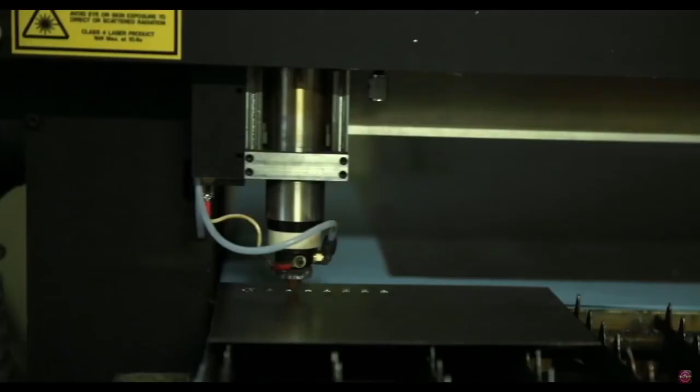The biggest set is maybe 20 feet long, so it was a real challenge for the crew to make a film like this at this sweeping scale. We used basically every trick we had. It was one of the most challenging, most ambitious things. You can see each day when they change their top, the animator in the background, their clothes change—that shows the move to the next day.

So there's a scene in this with a giant skeleton thing. You'd think they'll just make a miniature version of it and make it look bigger, but it's actually massive. Look at it.

A lot of people working with practical effects in films now are going out of their way to make something extreme. I'll show you a Weta Workshop video from Blade Runner 2049.

Essentially, we created this high-tech thing to move the torso around, but at the same time, it was like a marionette because we had these cables.

This video is awesome. It's by Weta Workshop, based in Wellington. Has most of you seen Blade Runner 2049? There's a lot of practical effects in it—people are creating a renaissance in practical effects.

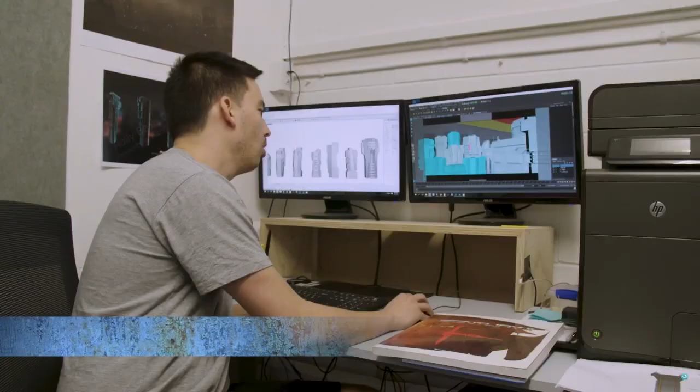The story, of course, was advanced—it's decades after the time of the original film. Los Angeles has been built up a lot, and LAPD, the newest of all the buildings, stands above all as the tallest building in town. LA surrounding buildings: we've got about 37, 48 scale, medium-high detail buildings. Each building would probably take about a week to make. Once they get approved, we run them through the previs, calculate the scene, and start adding the details.

Stop it! This makes us sad. The way LA is, it's all from underneath—this glowing city light you get to see because all these buildings are so big. You paint up these buildings with their light. All those things as a miniature form this giant composition of tiny little vignettes, tiny little stories, tiny little places, all needing to work together to make the whole miniature work.

We call those existential crisis moments, where graffiti would be painted—lots of little details like that. We've gone in and distressed some specific areas to make the building look like it has that decay and crazy weather from the Blade Runner world. We are locking all the buildings in place with these boxes, so when we actually have the camera running through the building, everything lines up. Pretty much each building has some fiber optic development.

Or the preliminaries of a miniature build for a trash mesa, which is an enormous expanse of ruined technology. You really have to have the feeling that it really is rusty metal, that it really is crumbling and falling away.

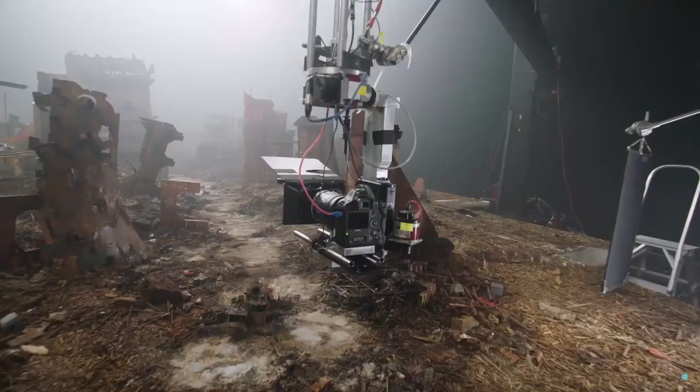It has all of the inherent flaws of building something. Real surfaces, illuminated with real light, with all the issues of tiny specular reflections.

The Wallace Tower, the bad guy's headquarters, that's 600th scale. In reality, it's about 3.5 kilometers tall. At that scale, a human figure against these pieces of concrete is going to be a very tiny scale to work at. So we have to find a method of surfacing them where you get the sense that you're seeing laid up stonework, even though you actually don't.

They're really bigatures. They're not miniatures. They're massive buildings. They're just stellar pieces of art.

There's a lot of Blade Runner in there. It's almost the thing we say when we look at the footage: is it Blade Runner yet? Not quite. We have to tweak the light a little bit more, have to tweak the model a little bit more. It's supposed to be a sort of dark, stormy morning scene.

Now to do that effect, the easiest way is to break down the shot into a series of elements. We shoot the skylight, we shoot the internal light, we shoot the lights of the little clearance light. Then when it's time to build the shot, you have complete control. You say, well, I want the red lights to be brighter, and you can bring them up without changing anything else. So effectively, you're building a huge and very complicated sandwich that actually becomes the finished shot.

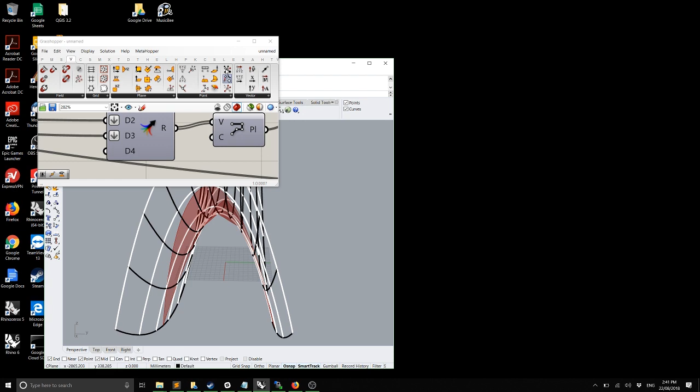What should we start with? So, we did dispatch and weave a few weeks ago, right? Dispatch and weave is one way. Using dispatch and weave is to do things with patterns, where your pattern's true, false, and effectively it can split things apart and you can do things with them in a patterned-like fashion.

So, there is another way of using it, and I believe you guys should all understand what this is, because it's been taught to you already.

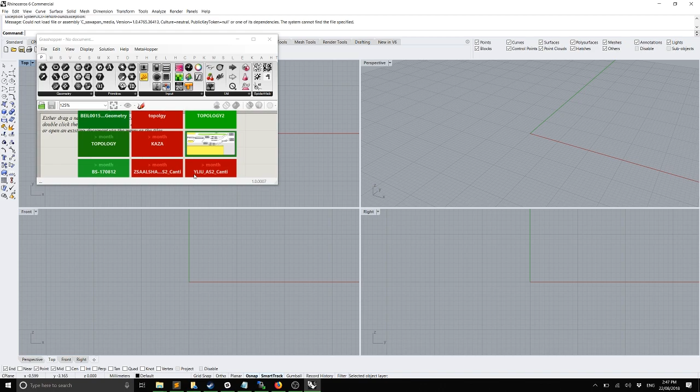I'm going to draw some lines. Actually, let's do this. I'm going to draw lines from these points. The way I'm going to do that is by using a partition list, which will then break each of these points into groups of 2. No. I refuse. No problem.

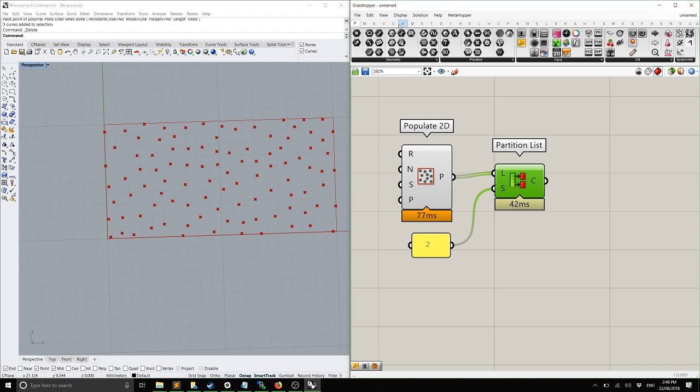And then, from that, I'm going to draw polylines, drawing a list of lines, okay? Now, the important part of this in Grasshopper, or actually in any program, is the way that you generate the true and false. And a lot of that comes down to doing analysis.

So, what can I analyze from a surface? Give me something that you could analyze from a surface. The what? Really? No, like the material? I mean a NURB surface in Grasshopper. It's what? It's size. How do you describe size? It's volume. So like if it was closed, yeah, you could measure its volume.

But what were you thinking? Surface area? No, the length of the line, yeah. Okay, yeah, you could measure its length, like the length of its edges. How many sides do surfaces have? At least one of those has to have a length, right? Yeah, you could measure that. What else, can you think? Yeah, like if there was a plane, if it was oriented a certain way. Yeah, you can do that.

Guys, just as a reminder, every possible thing that you can do in Grasshopper is in the ribbon, okay? So if I go to surface, I can find under the analysis section all the analysis that I can do to surfaces. I swear this is out of focus.

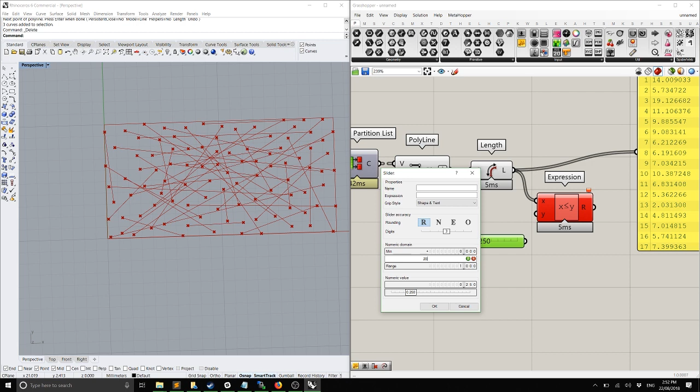And so what we'll get is a whole bunch of falses because none of our curves are less than 0.25. But as I ramp this up, this begins to generate a true and false value for each curve, for each line, for each element, no matter what you're analyzing.

So I've got a list of true and false values. Now what happens if I plug a true and false, only 2 values, into a dispatch, but I have 100 values going into the actual list? Dispatch effectively rolls over that like a pattern, right?

So if I go true, false, then the next value will be true, and then that one after that will be false, true, false, true, false, true, false. But in this case, what we've done is we've just generated a list that is exactly the same length as the list that we are going to run the function on. So it doesn't need to repeat. Each individual true, false will be related to the item that it's dealing with, okay?

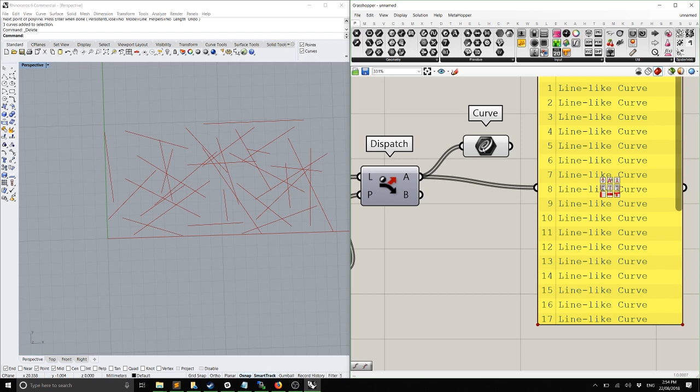So what that means is all the lines that I put into the function here will come out true. So all the ones that are longer than 10 are going to be in my A list, and all the ones shorter than 10 are going to be in my B list. Or, sorry, that's the opposite - everything that's shorter will be true. So these should be all the short ones, okay?

Does that make sense? So what we've now done is we've created, in a way, the if - this part. Whatever we do to these curves now, once they've actually come out of the dispatch, is the then.

So for example, if I take all the ones that come out of A and I do something to them, such as pipe them - so all the short ones we're going to pipe. Cool. So what I've done is I've said if less than 10, then pipe.

Else, let's extrude the ones that are long. So we're going to extrude the ones that are long.

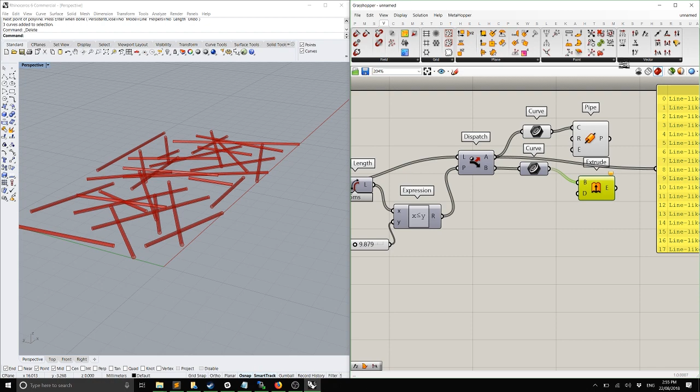Ta-da! Right. And then if we want to bring them back together in the same list as before, like in the same order, so we've still got these all in the same order as they once were, as one group, then what do we use?

What do we use? What's the opposite of dispatch? Weave, right. So if we weave these back together, which ones were the extrude? What value did they have associated with them in the pattern?

Which value? Were they true or false? False. So where would they go in the weave if we were to use the exact same pattern to bring them back together? 0. True, false equals 0, and therefore A, or true, equals 1.

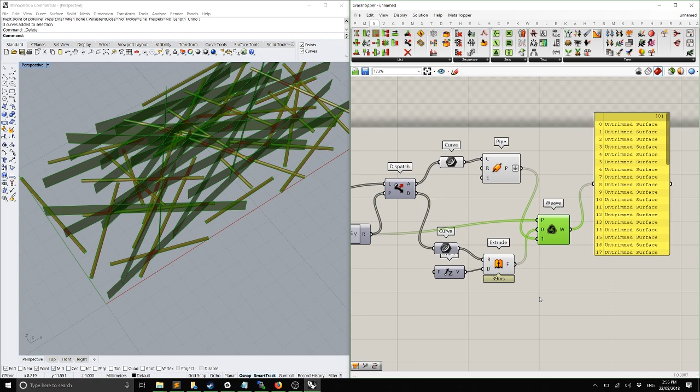So this will bring them, and that needs to be flat. That will then bring your list back together and actually just create the completed if, then, else. Okay? It's that simple. And it's very powerful because you don't have to use else.

Like your B's, you don't have to use them, or you don't have to use your A's - they can just sit there and do nothing. And so you can start filtering out things, isolating things. So for example, you might randomly generate some stuff, but you only want the ones that are a certain size, or if they're planar, blah, blah, blah, then do something to them.

You could randomly generate true, false values to create glazing in a roof, for example. Or you could test whether or not a surface in a topology is of a certain steepness, and then if it is, then flatten it, etc. So it's very useful.

And just to demonstrate how it works, we can then slide from making them all extrusions through to making them all pipes. Cool?

Does that make sense? So everyone understands if, then, and else, and now we can do if, then, and else in Grasshopper. That is one of the red functions I expect in the checklist, so if you use this in your design, you'll get extra marks.

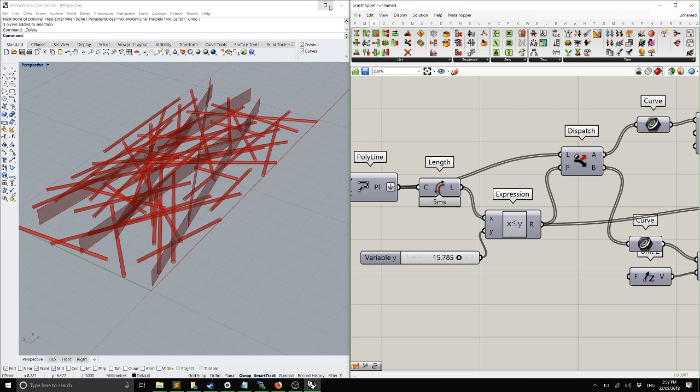Okay, we're going to talk about geometry pipelines in the tutorial, and it's going to blow your minds. You know what I'm talking about? I might know what it is, just not sure.

I warned the class not to sit far away, to come closer, but they're not, and now they're not going to be able to hear me. I know you're charging, you'll just have to listen to this in the video when I put it on YouTube. You'll be able to hear me, you just have to watch it. You'll get this joke when you watch the video, okay? You're looking at me right now like, what the fuck? But you'll get it when you watch it. That's exactly what I said. Everyone else watching this is going to be like, what's the point, Andrew's just talking to Arlene at the beginning. So hello to everyone else watching right now. Hi.

Where is my Grasshopper? Why doesn't it exist? Uh-oh.

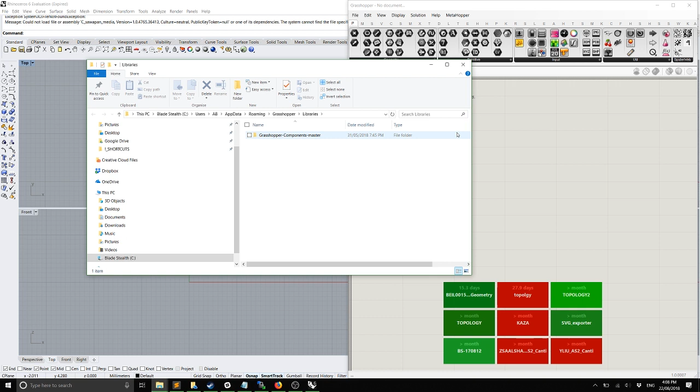The thing is, there is a vanilla version of this. Yeah, it's called Geometry Pipeline. You've never seen this? Okay, what is this? It's this component that we've never seen before.

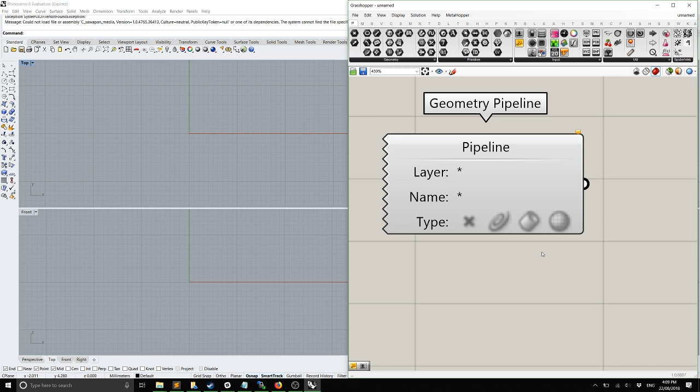Okay guys. If you go, have you ever... so you've never installed a plugin before? So to install plugins, usually you have to go File, Special Folders, Components folder, and that will show you the folder that you need to put your plugins in.

Which one? I have no idea. Just the top one, top one. We might not use Elefront today.

What do you have to do? You have to paste it into this folder. This folder, you can get to that folder. If you go to Grasshopper, go File, Special Folders, Components folder, that'll show the folder where to put it. No problem.

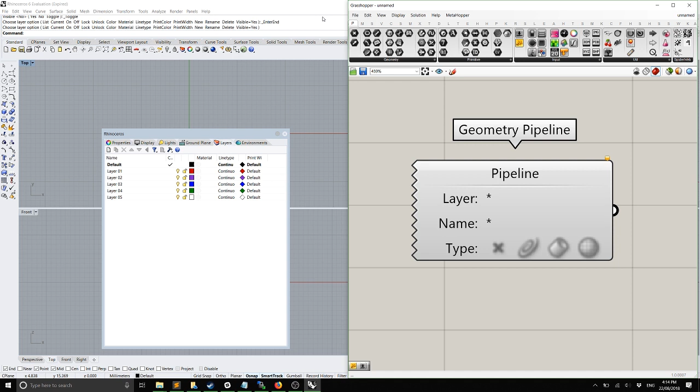Lack of people to do this. What does lack of mean? Lack, what does that mean? Oh, there's a lack, yeah, lack. What does your mum do? Architect. Yeah, there isn't many people that do this.

Okay, we there? We good? Okay, what I want you to do is open Rhino and Grasshopper and pull up the Geometry Pipeline. It's one of the only components that has a spiky left side, and that's why it's shit.

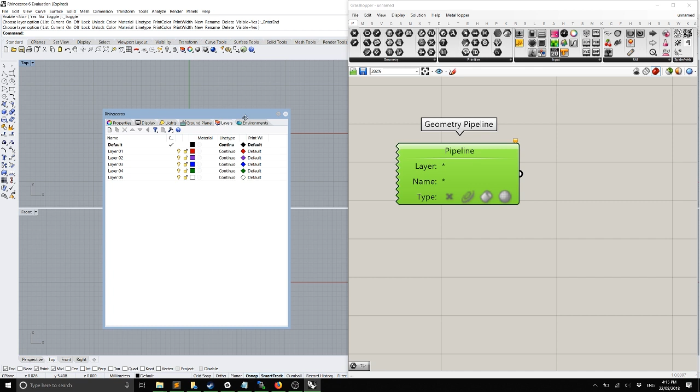Now you're going to be impressed with this, I know. But I just want you to consider that this is a shit component, and the better version of it is in Human. I just want to demonstrate what it is with the vanilla version first. So this is the vanilla version. I'm going to delete that now, and we're going to go use Human's version.

So if I go to Human, which is this one, and let's grab dynamic geometry pipeline. Much better because it's called dynamic. It's got dynamic in it.

So, how have we grabbed geometry from Rhino and placed it into Grasshopper in the past? We got to get a parameter, place it into Grasshopper, then right click it, set one or set multiple, and go pick those objects in order in Rhino to get that into Grasshopper. Dynamic geometry pipeline is a way of getting geometry into Grasshopper another way.

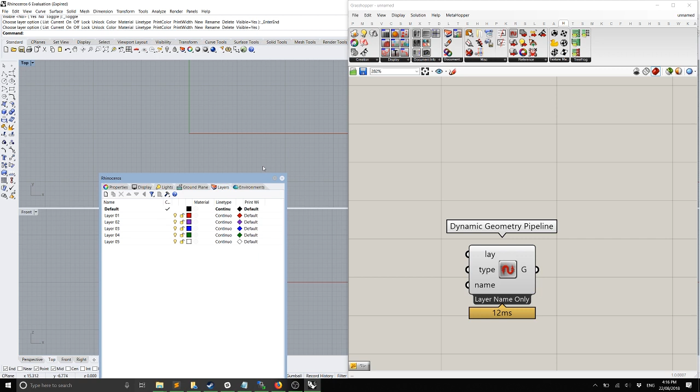So what it does is it allows you to pick objects from your scene, from your Rhino file, by using selection filters. For example, if I go onto layer 1 and I draw a line, in my dynamic geometry pipeline, if I type layer 1 into a panel, it has to be exact, and I plug in, the type needs to pick up a curve.

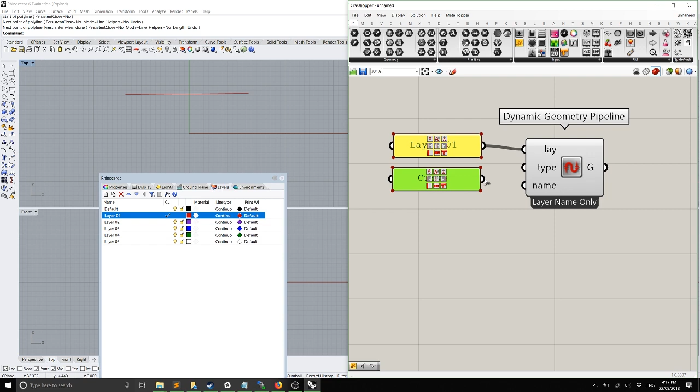And I'll make these bigger for people to be able to read. Can you read it now?

So what we can see from the outcome of that is that it's now picked up that line-like curve. So if I now divide that just to make it obvious, we can see that that curve is now divided.

So what does that mean? That means if I draw any curve now on layer 1, it immediately picks it up as part of that script.

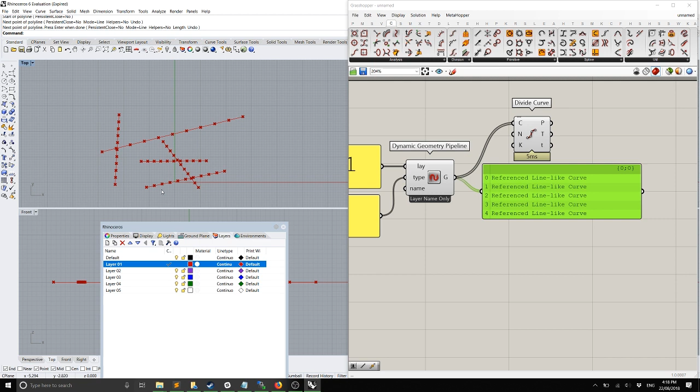Wait a minute. What's your error say? Solution exception, object reference not set.

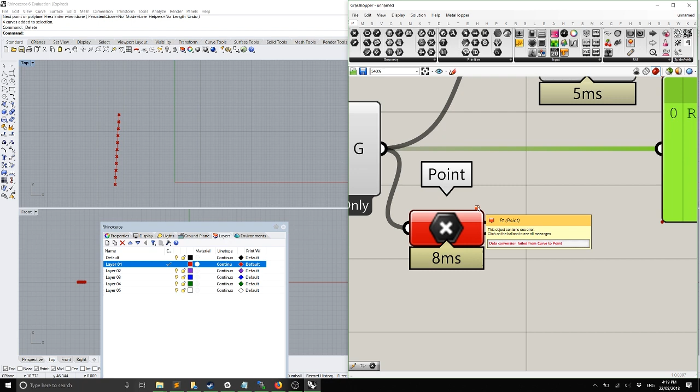So what do you mean? Have you drawn anything in Rhino yet? Okay guys, I want you to go to the layer that we've written in. Go to layer 1, and I want you to draw a curve. Draw one, it could be anything - a circle, a square. The important thing here, guys, is there has to be something drawn in Rhino on that layer. If you haven't drawn it, it's not going to be able to pick it up.

I'm surprised they're not impressed. This is actually going to make things a lot easier to design. I just explained how to use geometry pipeline. If you grab dynamic geometry pipeline, you need to probably go explain this to Jamie, seeing as you just missed it.

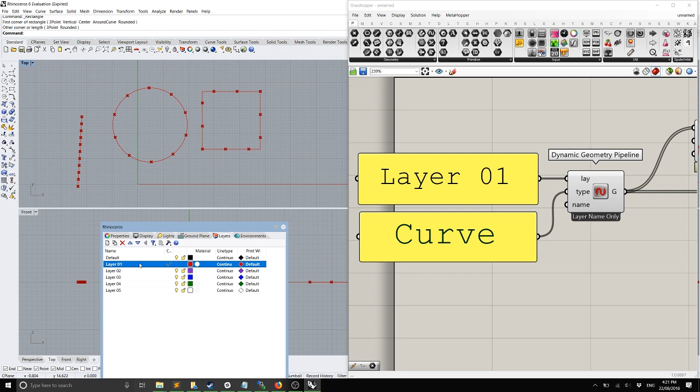Then put in layer 1. So that means it's going to pick objects from layer 1, all the curves. Then if you draw curves in layer 1, watch - if I draw a curve on layer 1, it does the thing that we need it to do. But is it just curves or can it be anything?

The other one's going into what? I've got that going into a divide curve, which is why it doesn't work. With all due respect...

Because it's advanced. Let me... there's more, there's more. You'll see why it's advanced soon.

Guys, are we all there? We all got it, yeah? Do we understand why this is important? So why? Why, Louis?

More options. Well, what that means is that you can write a script that runs whilst you draw.

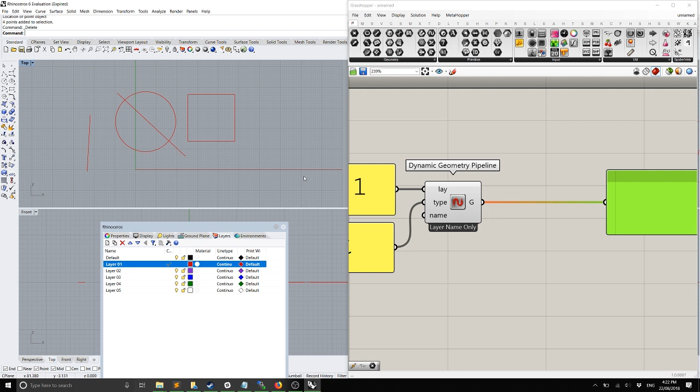So what we're going to do is we're going to use name as well, so you can actually name objects in Rhino. We can give them names, right? So what we're going to do, quite quickly, is we're going to grab the curves. By the way, if you mouse over type, you can pick points, curves, B-reps, meshes, hatches, extrusion, lights, text, and blocks. And if you want, you can type all and it will grab everything from that layer, not just curves, not just points, everything, okay?

So, this is where it gets interesting. I'm gonna hit a few issues that I saw in assignment 1.

A lot of you are trying to make plastic objects. Plastic being like you had to Boolean, everything was getting Booleaned together when it might not necessarily need to be Booleaned. Like for example, a hollow box. If you take a cube in Rhino and then make a smaller cube and try to cut that out of the bigger cube as just a hollow cube, it won't work, okay?

So normally when we draw things in design, we draw them how they would be built. The ceiling and the walls aren't actually made of the same thing - they're made separate, almost like separate elements. Obviously you can see the concrete blocks that make up these walls, but we usually don't draw every single block. Arlene's design has a brick wall that's literally drawn every single brick, but that's because her wall needs to be drawn that way since the bricks are separated - it's not a solid wall. So we don't actually need to Boolean the ceiling and the floor and the walls together to make a single object.

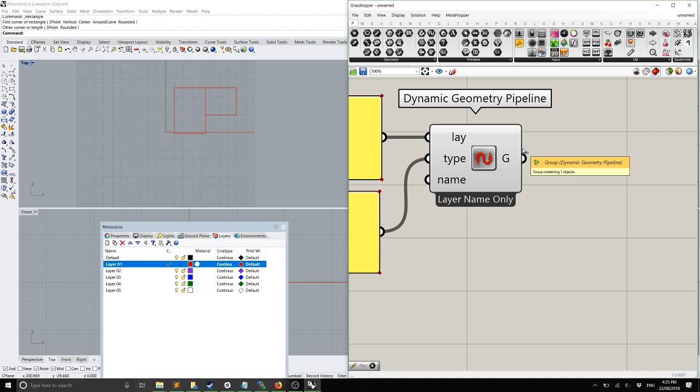And what we want to do is bring those curves that we draw in whatever layer we choose into Grasshopper using the dynamic geometry pipeline. Cool, we're there. Should be pretty basic, right?

So let's think about the various objects that these walls are going to create, these outlines. Let's start the way you would build a house. What comes first? Okay, which is another way of saying...

The floor. Okay, we're going to do the floor first. So if this is the boundary of our room, then what is something we can do to just describe a slab of concrete, let's say, assuming it's concrete. So we're just going to add thickness to it, right? Is it going to be flat? Is it planar? So let's create a boundary surface.

Plug our room curves into that. And I'm going to make this 3D now. Pardon me.

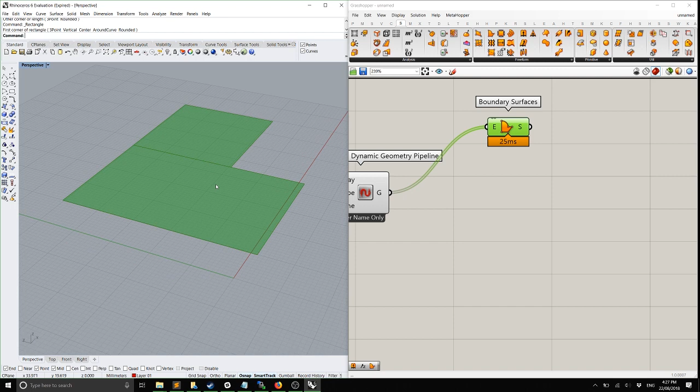Cool? Okay, now let's give them thickness. We're going to extrude them, and we're going to extrude them down. So we're going to use a Z vector, unit Z, and plug a negative value into that. I know slabs generally are 150 to 200 mil deep. This is actually going to quickly demonstrate that my scale is off, because if I plug minus 200 into my unit Z, then bam, look at that - we get a huge thing, right?

So what that means is these guys are too small. So I'm going to scale these up so that it at least describes 4 meters. There we go. Wow, that's also...

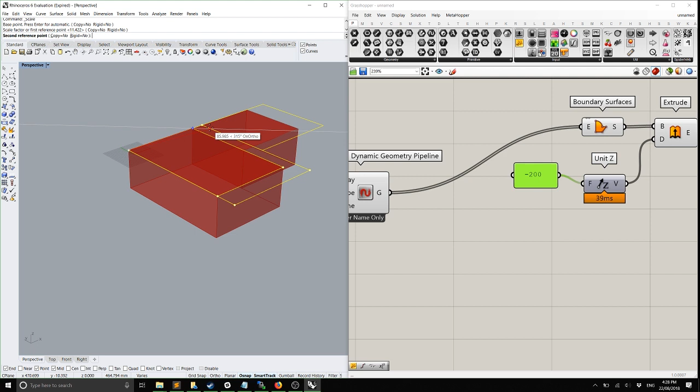I selected my objects and selected scale. I clicked a point I want to scale from, then picked another point as a reference point. Whatever number you type in will determine the actual length between those two points. I picked those two and said I'm going to make that 4 meters, so 4000 millimeters. Typed 4000, enter, which makes it 4 meters long, giving me this nice, realistically sized room.

Not a room for ants. What is this? A center for ants?

This is empty. Do you have objects? Do you have curves drawn in Rhino? Can you?

This mouse is massive.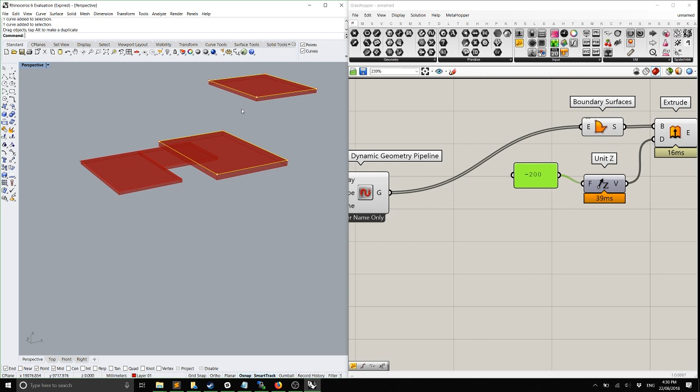Right? Because this is a process of learning. It's a process to learn. Okay?

One more time, one more time. Let's do a circular slab. Yeah. Ah.

Oh my god, so easy. Okay, so we're saving a few clicks, right? Yeah? We're good, we're good.

Okay, so then, assuming like a ceiling is just the slab moved up, just let's forget that. Let's do some walls, right?

So how should we do these walls? What would you do as a wall in regards to these outer edges? There. Yep. So let's offset them.

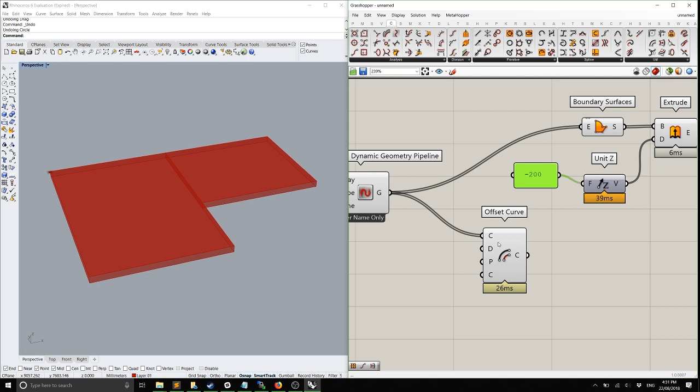And we're going to offset that by a distance. Walls are generally between 100 mil and 300. If you want to go thicker, you're probably doing that because your movie infers thick walls. Because most people don't do walls thicker than 300 normally.

Unless you have like a supercomputer you want to protect from radiation. No, you would do a different thing. You wouldn't do it with a wall. Yeah.

So we'll go, that goes up to 300. Cool, and yeah, I get it. I know that this process is eventually going to create a double thick wall between these two, but that's fine, we don't have to worry about it too much.

So let's not have it go out, let's have it go in. I'm going to set the distance to an expression. Everyone's familiar with expressions. The expression we'll set is minus x. So that's now going in.

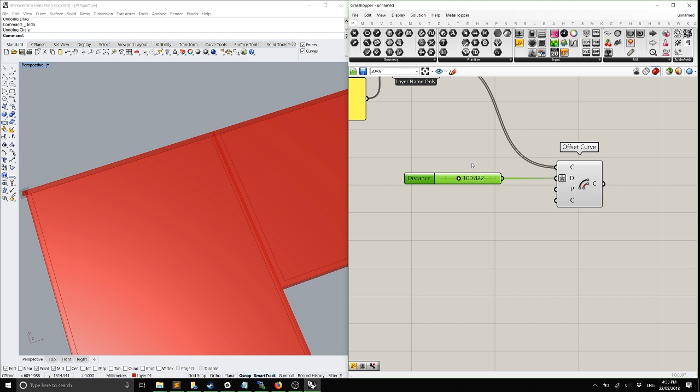Okay, now just be mindful, guys, that if you've got two curves touching in a boundary surface, sometimes it just makes them one curve, okay? So to isolate that, to stop that from happening, what we can do is graft the curve before it goes into the boundary surface, okay?

What that's also going to do, if we now graft our curves coming out of the dynamic geometry pipeline, they're going to be in the same branch structure as our offset curve, okay? Which means that when we start working with these separately, using the exact same process, it isolates each curve, each branch into its own group, effectively, okay?

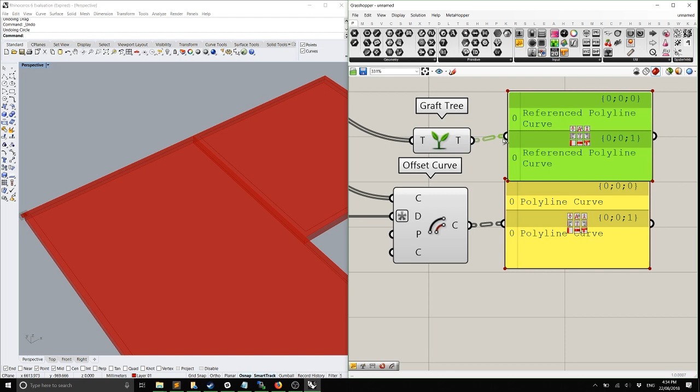So then, if we use these in its own boundary surface function, it will ignore everything outside of its branch, but then create a boundary surface just between the outer curve and the inner curve, and not the outer curve, inner curve, and its neighbor, and its neighbor's neighbor, okay? That becomes important when you do stuff like this, right? Because if these overlapped, the boundary surface might want to relate to each other, so making them into their own branches helps.

And we're going to do something even funkier soon. You guys are going to be surprised with this one. So,

If we extrude this now in a positive fashion, not a negative one, it's going to go up. But as you'd notice, some rooms have a different height to others, and it's generally a good idea to play with different heights in rooms because, for example, I've asked you guys to choose a client, and you really should have already chosen. You should know in your head right now who it is.

Is anyone interested in using the physical effects creator? Okay. What is the requirement of the physical effects creator's extra space?

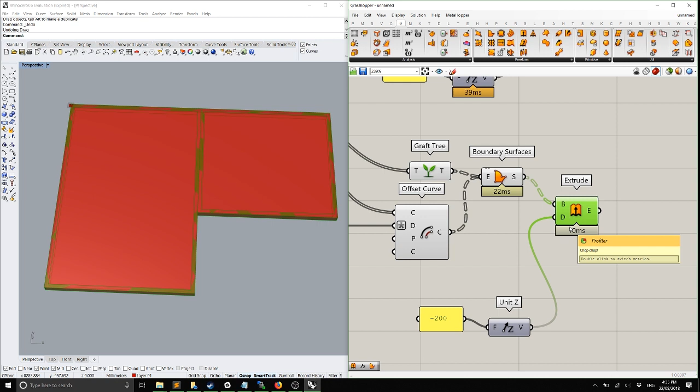It needs to be 2 to 3 stories. A nice, comfortable floor-to-floor height for most places is 3 meters. So there's my walls at 3 meters. This is already looking like an actual space, a building, huh?

Let's say this is our creator's double height space. You can actually give double height spaces to the other clients as well. They don't have to be just this, like the physical effects maker.

What we're going to do is start pushing extra information from Rhino into Grasshopper. In Rhino, if we select objects and bring up the layer or properties tab. Now everyone's using Rhino 6. Who's using Rhino 5? I'm going to teach you how to do this for Rhino 5, but then show everyone why Rhino 5's shit. You'll realize why you need to go get Rhino 6.

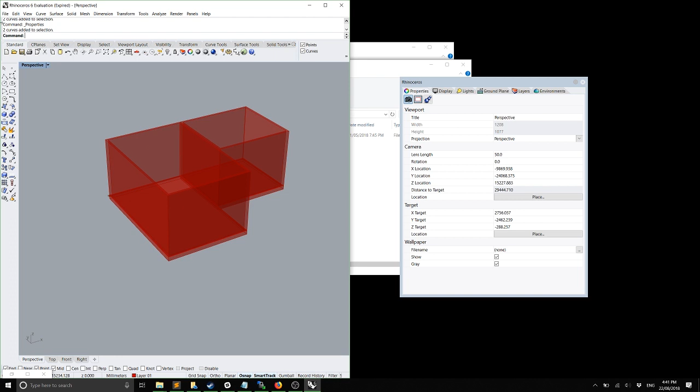Okay, we're back to actual teaching Grasshopper. Has everyone typed 5,000 into their curves? We're going to select one of them and change it from 5,000 to 3,000. So one of them is named 5,000, nice to meet you. The other is 3,000, nice to meet you. That's your name, 3,000 and 5,000.

If I look at the script, is there anywhere I've typed one of those two numbers? Why not? So what do those numbers represent? They're potentially the height that we want those spaces to be.

Human isn't just a plugin for pulling geometry into Grasshopper. It's also a plugin that can help us do other cool things, such as extracting an object's attributes using object attributes. If I grab the geometry from a dynamic pipeline and a panel that describes the name, here we have 5,000 and 3,000.

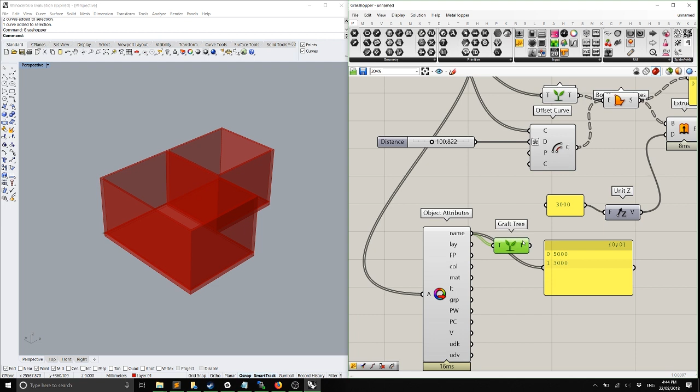Graft, okay? We're going to graft this list. So let's graft the data. Instead of using this panel, we're going to use the grafted data as the Z vector. And now our 5,000 room is 5,000 tall, and our 3,000 room is 3,000 tall.

No difference, no, it's just visual. You can use either.

So guys, just consider this now. If a curve that you've drawn doesn't have a name, it doesn't have walls, okay? Because those walls don't have a number to describe their height. It's null. So you need to select your curves and give them a name for them to have height.

Okay, we're starting to see a new way of using Grasshopper. Rhino is now useful. Yeah, Rhino and Grasshopper work together, okay? Always work together. So this is cool in Rhino 5, but it's even epic in Rhino 6. Sorry, man, sorry about that.

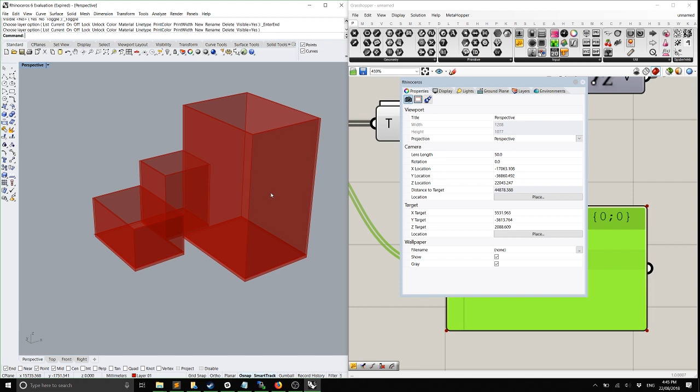Okay, so I don't want to name my room its height. Why name your room its height? That's silly, right? And what if you have other information you want to store on the room, like what if you want it to be named toilet or WC or master bedroom or creator space, right? So instead of storing heights on the name, let's select all of our curves, however many you've got, and check this little tab over here.

It's called Attribute User Text. Those of you using Rhino 5, you are not going to see this. It doesn't exist. This is something I asked for, and this is something they provided.

Yay! No, I'm serious. Did you actually ask them? I was the only person that asked for this, and they added it to Rhino 6.

And this particular thing in Rhino 6 actually effectively turns Rhino into a BIM package. A lot of you don't even know what BIM means, right? And one day you're gonna be like, Andrew, we hate it, we hate it so much. I just want you to remember that Rhino is BIM, okay?

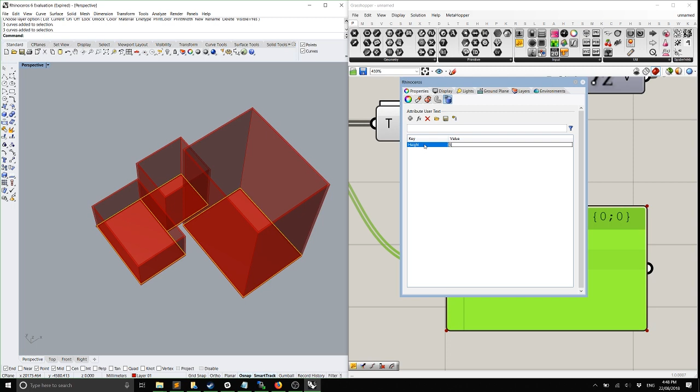So what we'll note is the names haven't changed, but we can see here under UDK and UDV, if I select UDK, that gives me a branch for each object, giving me a list of all of its user-defined keys. And there is a corresponding list with all the user-defined values. Cool?

So let's go back to the properties, back to the attribute user text, add a new one, and now in here I'm going to say use. So for each of them, this one here, its use for me will be the creator space. The smaller one is going to be a WC. This one here is going to be the bedroom, let's say. So now in Grasshopper we can see that we've got height and use, 5,000 and creator space, height and use 5,000 WC, height use 5,000 bedroom. Okay?

Is that a question? What's the point?

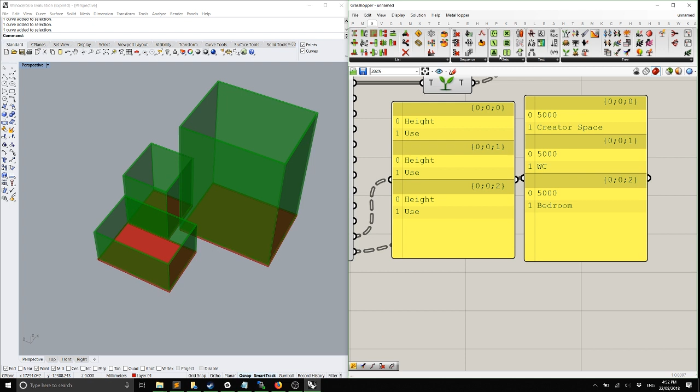So I'm going to introduce some advanced set functions to you guys. And that function is, under set, it's called member index. What member index does is if you plug a list into it and you tell it to go find an item, so for example, I want it to go find height, it will tell me the index of what height is in that list.

For example, if I now type 'use' in, what do you reckon it's going to give me, Branko? Which is 1. Okay, so if we type height, that's going to give us 0. So for example, if I actually remove 'use' from one of these curves, if use was 1, then that would go to 0, and that would be unique for that particular curve.

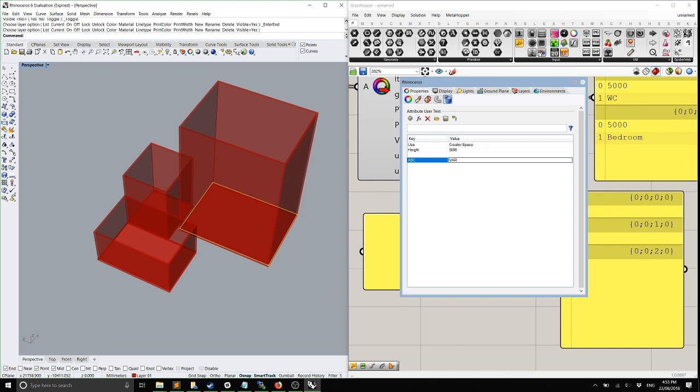I believe if I actually add ABC var... oh, it's doing them in order. Okay, that's fun. It's literally doing them but in order. Yeah, the way you've added them. Yeah, okay, either way, we've got item 0 now.

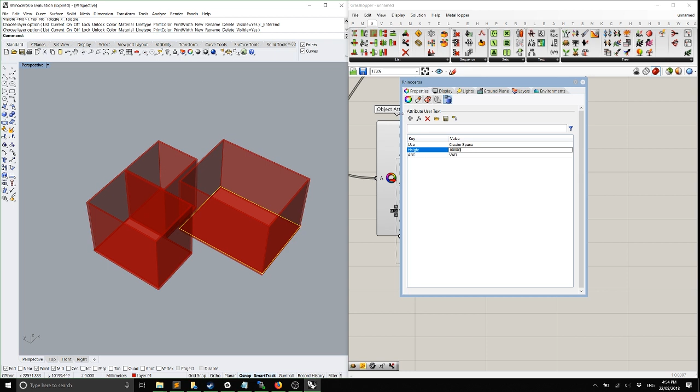So now if we use our list item, as you were correct, Vincent, then with our keys, if we pick out item 0, that'll give us the 5,000s there, okay? So now we don't actually have to graft this, and we can use the numbers coming from the list item to set the heights. So now instead of changing the name, we can change the object's height variable to 10,000, giving us 10 meters. Oh, that's big. Yeah. Cool?

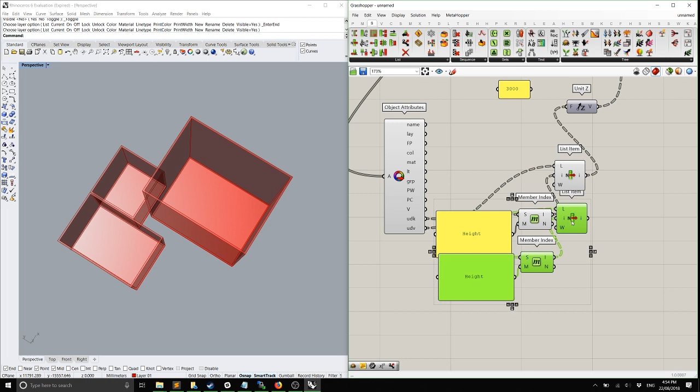Happy? Okay, so what does this mean for some of the requirements in the checklist? I have a series of curves, each with a use, right? If I quickly grab the use, that's going to tell me exactly which room is where, right? Creator space, WC, bedroom. If I quickly go grab that space's area using area, right?

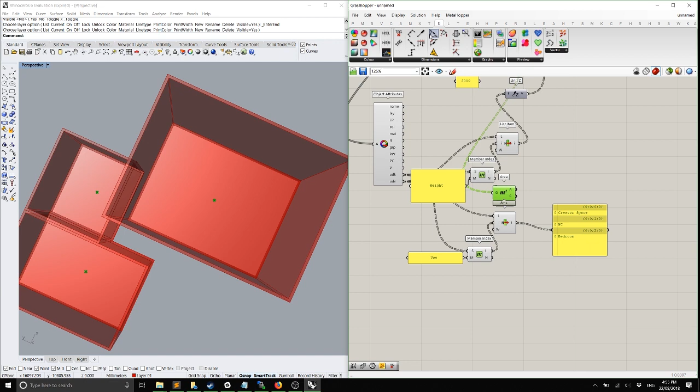So let's take the inner face of the wall, so the one that's offset. So you can see by doing so we're getting center points. I can use display to display a text tag at the location of the center point, telling me the name of the room. And if I put in a reasonable size into that, such as 500, there we go. There's our creator space, there's our WC, and there's our bedroom.

Yeah, it's kind of like that. Cool, we're there? Do you understand the use of this? Yes. Okay, can you have a... Did you say yes? You're doing a joke, my own joke to myself. Who needs help? Me! Oh, fuck you, Andrew.

Okay, and we can justify that. We can actually justify that middle center. So you got a nice little... oh, what? Do that again. You can right-click justify and then select middle center.

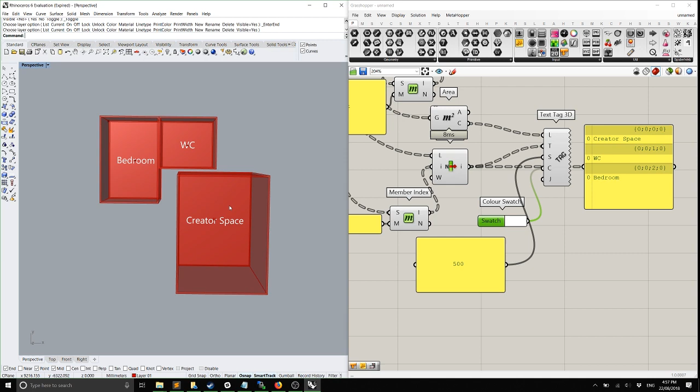I need my horn tooted as much as possible, yeah. Toot my horn, please. Branko's tooted my horn too much already, for the last 2 years. We've got an arrangement where he toots my horn and I'm satisfied. I love how much you care.

Okay, so we've got to look at this, it's beautiful, look at that. Now what is something that would be very interesting to a homeowner? I know you're all very young and probably not going to purchase a house in the next 30 years. Is what? The area. What area do we have? Now look, we've already used area, right? So what have we got? We've got the square millimeters, which is something we don't like to think in. Real estate agent: here's my apartment in square millimeters.

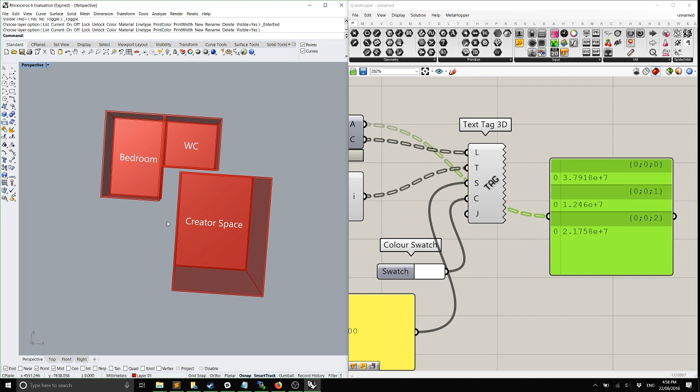Okay, because Grasshopper isn't actually in any units, it only uses units of your actual Rhino model. Then what you will need to do is divide that area by a certain number, I'll tell you that number soon. Otherwise there is actually... in human I believe.

Yes, but then you have to draw everything in meters. This guy here is another little human component. It uses Convert To Document Units. So if I say give me something that is 6 meters long, and I plug that into this component, the outcome is going to give me 6,000. Okay? So if I typed 6 inches, it gives you that in millimeters. And the only use for this will actually just be typing 5 meters, because I can't imagine any of you actually typing anything in inches.

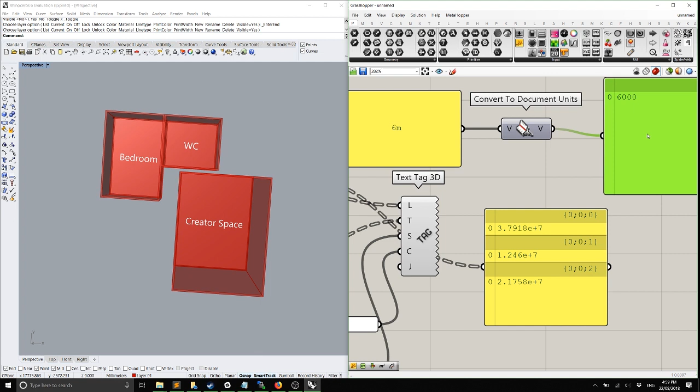I don't see any point to that whatsoever, unless you go overseas. There's only 3 countries in the world that use it. No, sorry, 3.5.

Okay, so what are we going to do? Does anyone actually know, off the top of their head, what I need to divide millimeters squared by to get meters squared? I love how you gave me the wrong answer. Yeah, so how many millimeters? I know you gave me the right answer. How many millimeters in a meter? And so if you had a meter by a meter, what's that? It's 1,000 by 1,000. And so what's 1,000 by 1,000? 1 million. Okay? So there are 1 million square millimeters in a meter squared.

Yes there is, there is. You don't believe me? Okay fine. So what we need to do is convert our square millimeters into square meters. So we're going to use expression and just divide by 1 million, which is 6 zeros: 1, 2, 3, 4, 5, 6. Now that's 10 million. Thank you very much.

Another interesting tidbit, just to deviate. Even though we just shit on imperial inches, I hate inches, they're shit, base 12 is actually a really cool number system. It's much smarter than base 10. Well, in base 10 it's harder to divide by 3 if you have a full number, right? But if I had 2 extra digits to our number system, we can still have decimal, but then 12 would be 10.

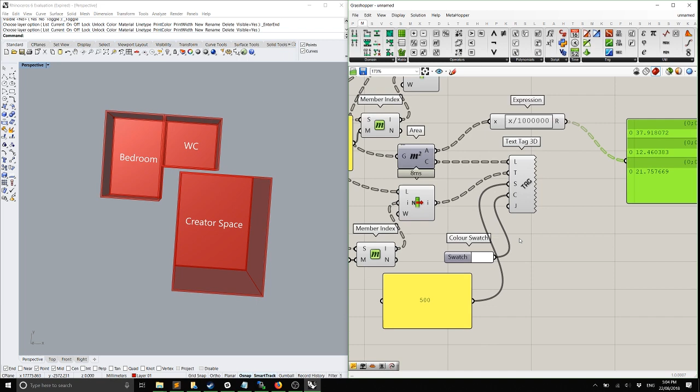Okay, so can anyone guess what this 37 square meters is relating to? Potentially, it is relating to what? And what about the toilet? How big is that?

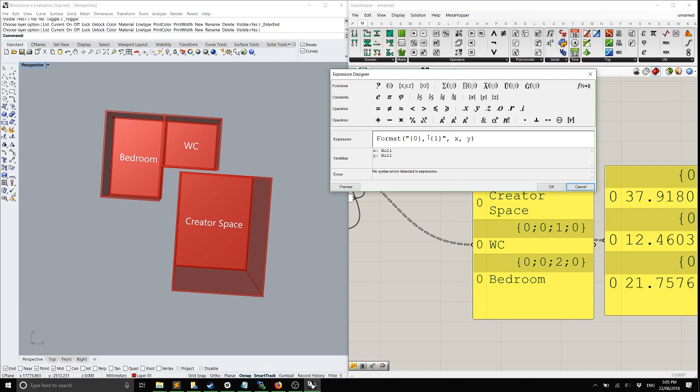And we've got a rather big bedroom at 21 square meters, right? Do you remember one of the checklist items is scheduling? You could quite easily tell me in the next assignment that your spaces are of a certain square meterage.

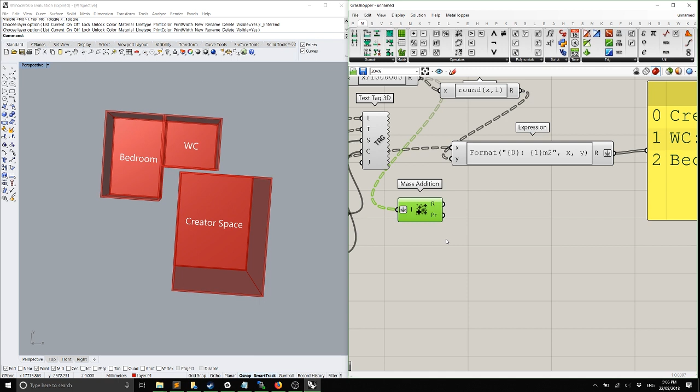And how much is that total? If we add all of these up with a mass addition that's flattened, round it, and here's our total, 72.

Huh? That's some new jokes. What did you say? How's that a joke? Oh, okay. You're stupid, cool? I didn't see that video.

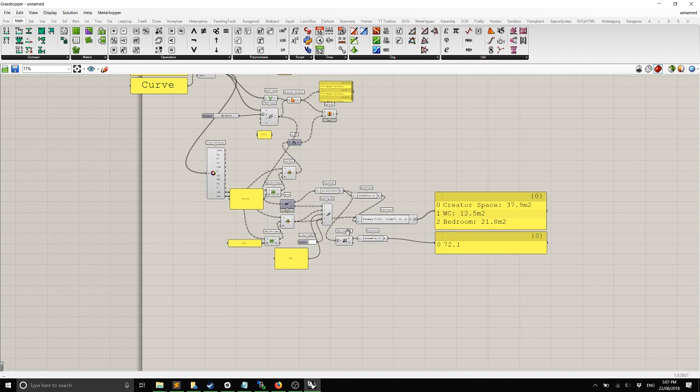I know it seems boring now, but one day you're going to be like, oh, I'm so glad Andrew taught me that stuff. Cool? Okay, so

Shall we give this thing a ceiling? Cap it, doesn't work. Shall we make windows? You guys know how to put a ceiling on this, right? All you have to do is move the slab up by the height. It's very easy, right? I'm not going to show that.

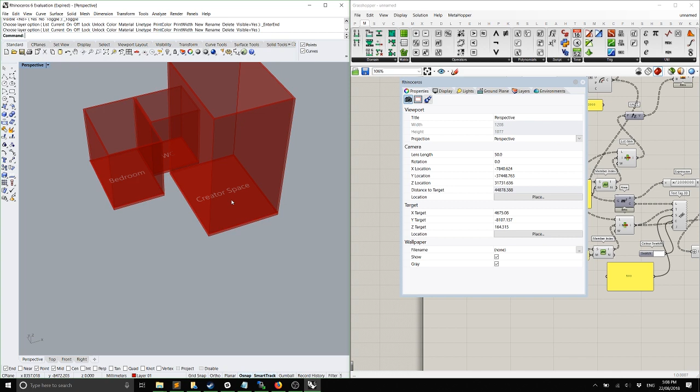Let's do windows. You want fireplace? Windows, windows, windows, windows. Yeah, okay, let's do windows. Sorry, man. This is going to be difficult, this is going to be really difficult. So let's have a think about this for a sec.

Let's do it manually. If I quickly grab my creator space, oh I love this, it's so cool. And I snap it in, right, and I bake these elements. Oops, let's make sure not to bake that. Let's bake that on another layer instead. Bake.

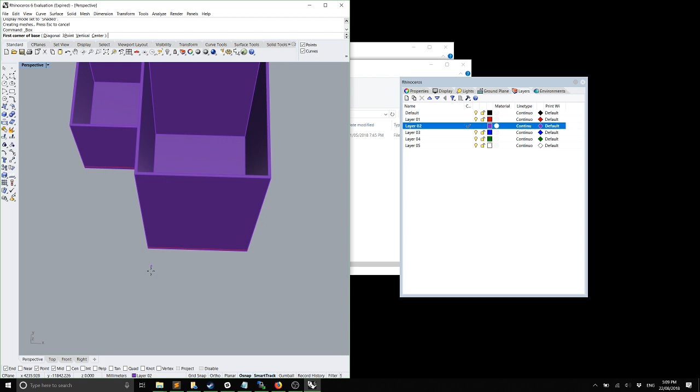Then typically you would actually use Boolean difference to probably put windows in, right? So all I have to do to draw a window is effectively draw a box that is the size of the window that I want, and use solid difference to cut that out. And there's my hole in my wall, okay?

But as we've probably seen, this is a very old school way of thinking about windows, okay? Because usually we make our windows now like the whole entire wall. So this whole facade is pretty much window. It's not actually like a hole cut in the wall, that is the wall. So, pardon?

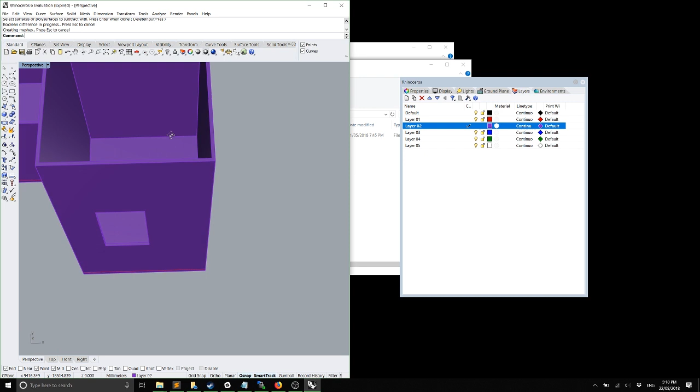There's so many ways of doing this. Okay, what we're going to do - you guys can make boxes and have them cut out in Grasshopper, done. What we're going to do is choose options for not putting walls in and just leave the whole wall open so we can put a facade. Or let's design the facade in Grasshopper. Yes, this is good, I like it. And this leads me to the final thing we're going to do, which is baking.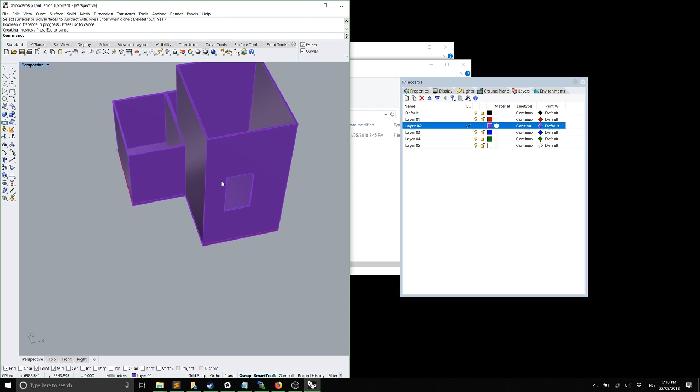Proper baking. I want to learn this. Is that what you're saying? Okay, so

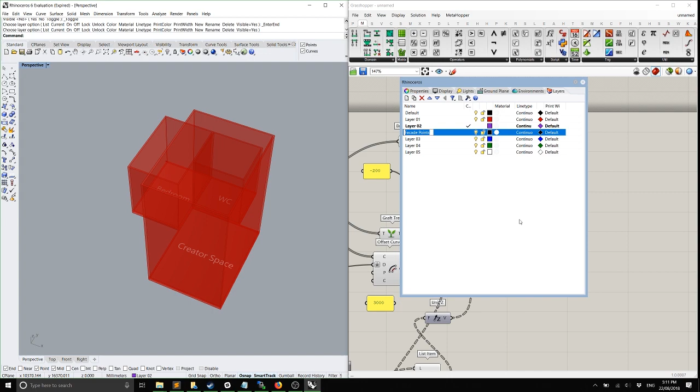We're going to pick walls that aren't going to be walls, they're going to be facade. The way we're going to do that is with points. We'll grab points, we'll probably have to put them on a layer that isn't being used for something else. So we'll create a layer and call this facade points - you can call it whatever you want. Just copy whatever you've written, and that's what we're going to paste into a new geometry pipeline. So we're going to grab points from the facade points layer.

Oh geez, we can really fill out these classes, can't we? It's almost done, it's 5:10.

Okay, I'm going to draw a point in the very center of the wall. So you can see I've drawn a point here in the center of the wall of the creator space. You can pick whichever wall you want. Yeah, I think I know how to do it without breaking people's brains. And we're going to use what we learnt today in the lecture.

Who's flicking rubber bands? Oh okay, is that a hair tie? It's a rubber band.

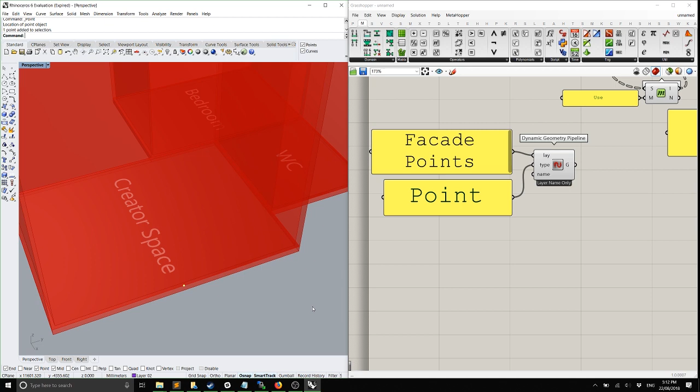Okay, so what we're going to do is use these points back up in the wall script. How come that's not reading it? By the way guys, if you've got a point drawn on one layer and you want to move it to another, you just select it, right-click the layer you want to move it to, and go change object layer, and that'll move it to that layer.

Well, that's one way of doing it. You have to pick the layer. Okay, so we're going to grab these points.

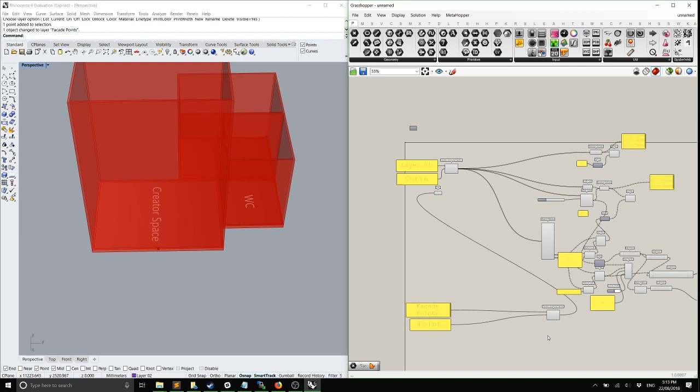We're going to use them here before they go into this whole mess. So what I'm going to do is select all of this except for the actual dynamic geometry pipeline and slide it over to the right, because we're going to work with this curve geometry as it comes out.

So as it comes out of the geometry pipeline, we need to explode it, which is going to put it into branches for us, which is great.

Then we are going to get the center points of each curve. If I reparameterize a curve, where is its center point's parameter going to be? Zach? Excellent, love it.

Do I need to stop asking that question now? Is it getting old? Did I hear a yes? Was that Michael? Yeah, it's getting old.

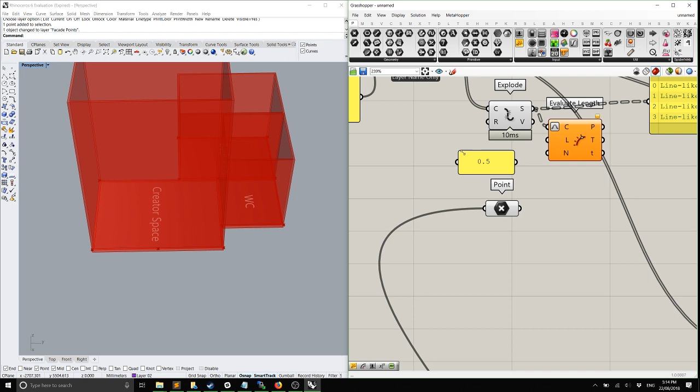0.5. Okay, so what that's going to do is give us the center point of each edge of our rooms, and we are going to test whether or not that center point is close to any of these points that we've drawn.

We're going to use closest point. Thanks, Branko.

Now, this is where it gets really interesting, okay? For this to work... I don't understand that. This is so dumb. It's dumb. For this to work—

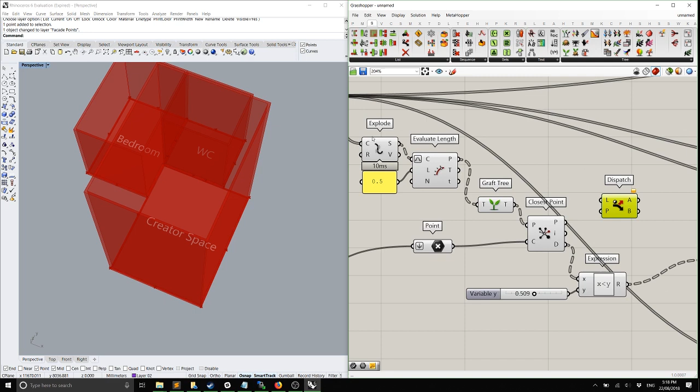So then if we dispatch our list of lines here using that, we need to just do this thing that I said, the shift list. So the one you're probably going to have to use is this one, it's called shift paths.

Is it really that boring? Okay. What was that, Billy? Okay. Be careful actually saying that you've got that, because there are actually people in this class that do. Yeah, I know, I'm telling Billy. I've got ADD, I've got ADD.

Okay, so we want to shift the paths, and we'll just use the default shift, but what we're going to do is simplify that list, giving us the list per curve, okay? I'll explain this all next week.

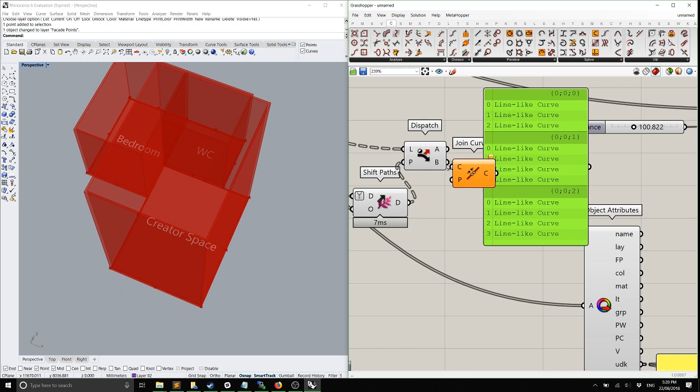So what that means is, when we plug that into the pattern of our dispatch and dispatch the exploded curves, we get one line-like curve, which is the one we want the facade on, and we get the rest as the ones we want as walls. So we can join those that are walls back together, creating the lines.

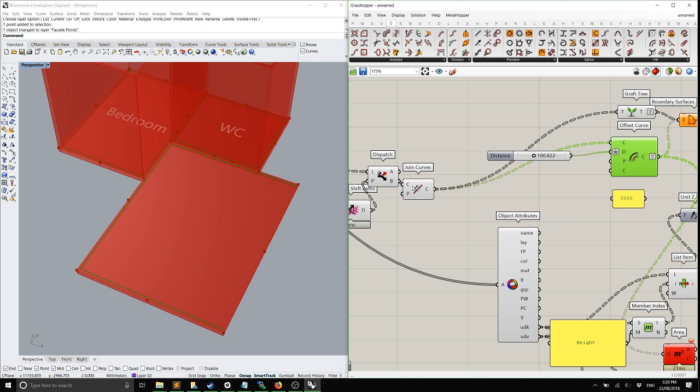We can then plug those into the system we've used to make walls, and that's broken it for some reason. Just remember, with this graft and the offset curve, simplify them - that'll fix the problem. Or it didn't. Why not? Ah, that's right. Don't join them up - plug them directly into the wall system.

That will break the wall system, because what we've done is offset, but since the actual lines that make up the walls don't connect, they're not going to create boundary surfaces - we've offset but haven't connected them. So remember to do that, or it's going to mess everything up.

Okay, for now, let's just make paper thin walls. Like so. We want to plug our dynamic geometry pipeline directly into the graft and the offset curve. So we're getting paper thin walls right now, and we'll deal with that next week when I explain all of these complex things.

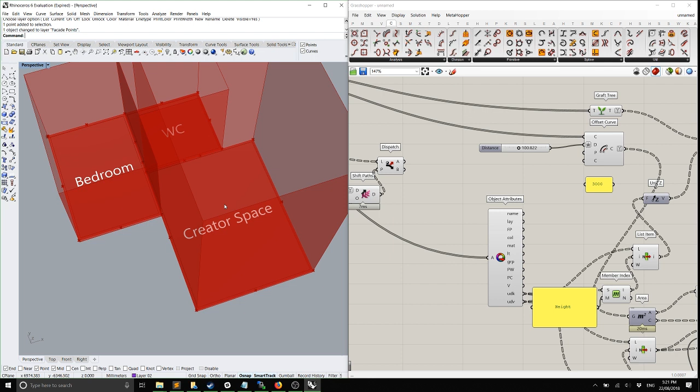The point being that we can now plug the B's out of our dispatch into the grafted tree, and they have that wall - actually don't plug that into the graft tree, just plug it straight into the extrude. And now the wall that was going to be the facade is no longer there.

So if I grab that point now and move it to another face, that now doesn't have a wall. We're testing the distance that wall is away from the point, and if it's zero or less than a certain number, then it is a facade. We can then make a facade from that with A, or deal with that in Rhino.

Does it make sense? Does it make sense? Yeah.

Right, we've got somewhere. We did something basic, something intermediate, and something rather advanced. I can see a lot of you have stopped following along because I've gone too deep into the rabbit's den, but that's good - that's a good lesson. I like that you can say, oh, it's too hard, I'm out.

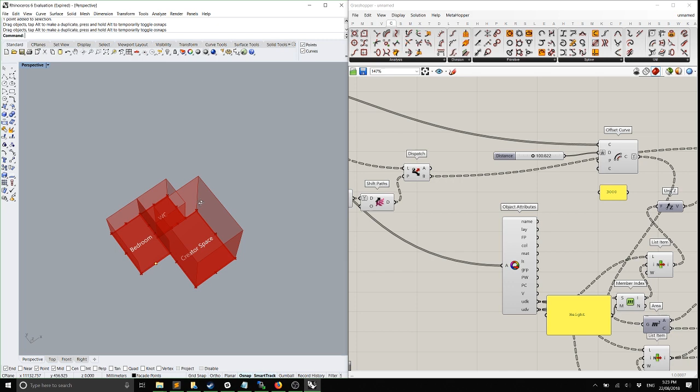We've used the dynamic geometry pipeline. It's very useful for doing cool things like this. I want to work with landscape points now.

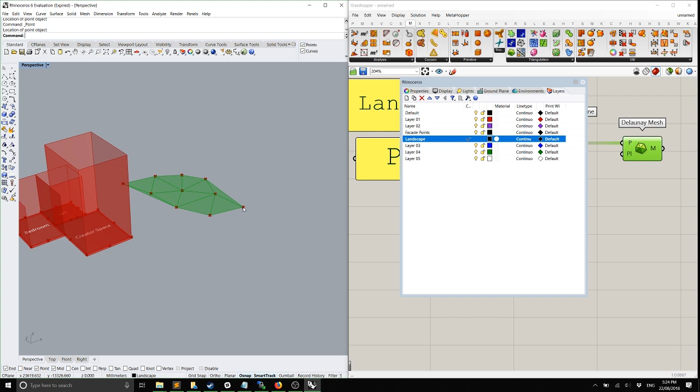Do you remember we used Delaunay to create landscapes? So if I plug points into a Delaunay, I can start using the layers with landscape. If I start drawing points in, it will create a Delaunay mesh where my points are, and I can start sculpting those points.

To start morphing that landscape into what I'd like it to be in a natural format - it's fast and quick, yeah, it's fun. I can do this - like this might be your actual contours, and you might want to put a pyramid in here. Let's put in a pyramid. Pyramid, done, cool.

So there are so many uses for this. We would consider a person at Cox who understands how to use geometry pipelines as moving into advanced computational design. A lot of you understanding branches is a nice marker of that, but being able to use branches and geometry pipelines effectively defines you as being top-notch.

And there's a lot of people professionally that know neither of those two things. So this is something that is worth learning.

Creating twisty towers and really cool facades, that's great, but being able to write a script that can apply that across multiple systems, or help people that don't know computational design create and design, while giving them that information - that stuff is critical, world-breaking, pioneering stuff.

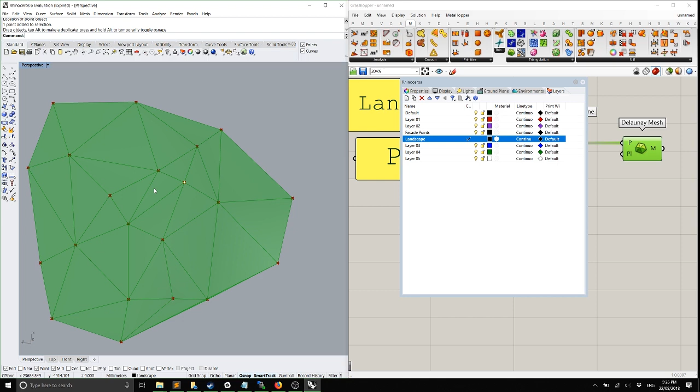Okay, so we've got about 30 minutes left. What do you want to do? Just want to chill out, have a chat? This is pretty full on, right? It feels like you're all quite worn out. Is that because of the assignment, the script, the videos?